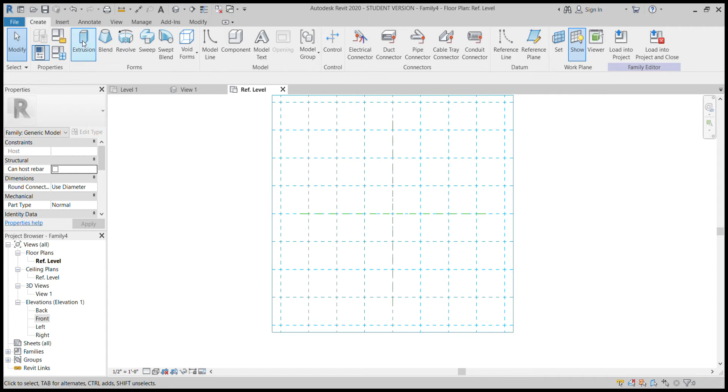The best way to show that is first we have to create an extrusion. So we'll come in here, create a simple 3x3 square, and make it come out 3 feet, giving us essentially a perfect cube. The way an extrusion works is it creates something off of a surface to add more. The void extrusion is going to cut out that shape instead.

If you click on the void forms, it gives you the same options as the regular ones, just in void versions. So you have a void extrusion, a void blend, a void revolve, a void sweep, and a void swept blend. They all work and function the exact same way, but we're going to stick with the simple void extrusion to start.

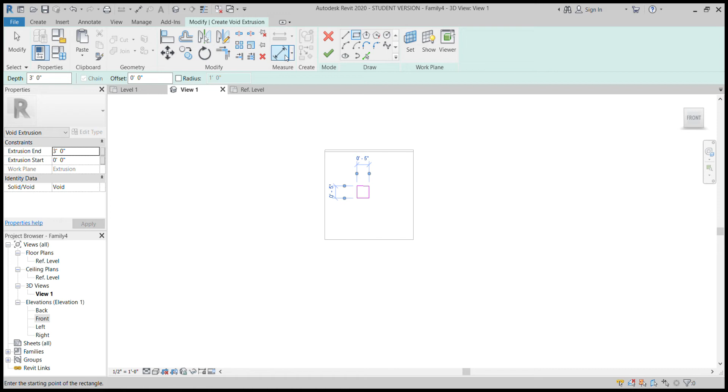This is where people get really confused: you have to pick your plane. So I'll click pick plane and pick this side, our front side. Let's cut out a simple 5x5 hole through it. With these, your start and end are different — usually your end pulls up, but this time it's going to push in. If we click OK, we can see it cut that hole into the shape.

Because it's a 3x3 cube, it went all the way through, and we can see it highlighted when we hover over it. If we click on it, we have the same drag and drop functions. But if we cut this down to just 2 feet, we'll see it doesn't quite make it all the way through — it only cuts partway.

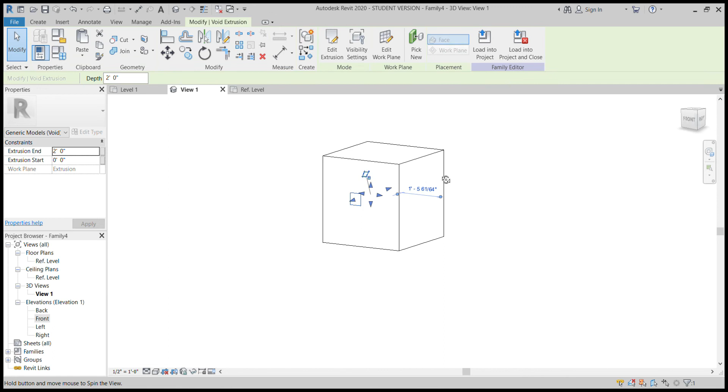So with this, you're able to start molding and crafting — it's kind of like sculpting. You could take a block like this and sculpt shapes out of it, and get really interesting results. Let's experiment with a few other options.

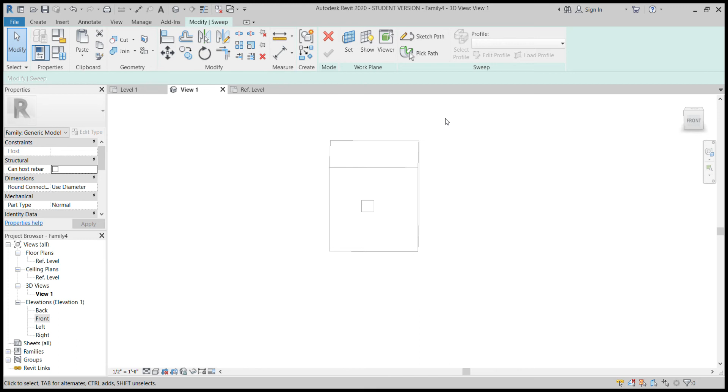So if we take the void form, this time we'll do the sweep. We're going to pick our path, and this time I'll use pick lines and just pick the top.

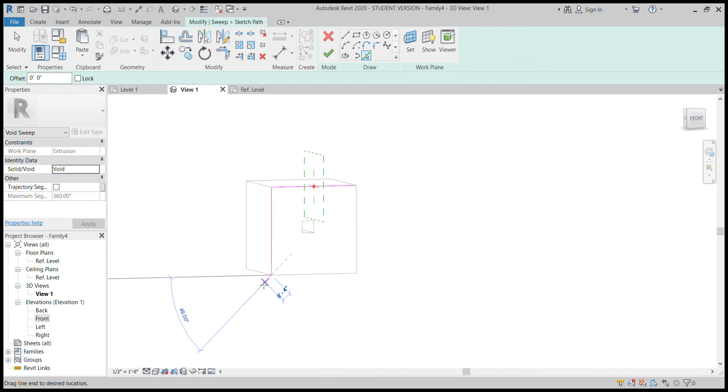It got mad at me because I clicked more than once. But if I do this, you can see how the line goes this way, that way — and this is where it gets tricky if you're not careful, because I actually don't want that line. I've got to square off and grab the correct line. Okay, so it still wraps it around.

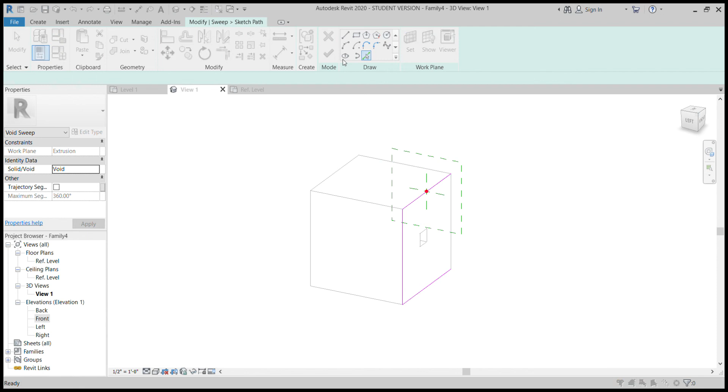Now what we can do is click OK — more than one loop, so let's cancel that and try again. We'll pick, once again, using pick line — we just want that line by itself. Okay, we'll take that one and leave it at that. So I'll click OK.

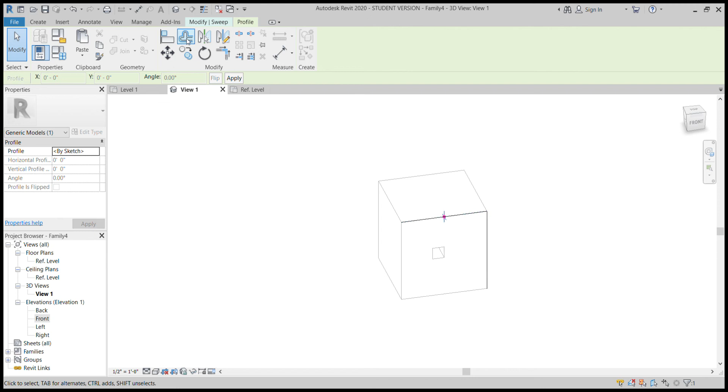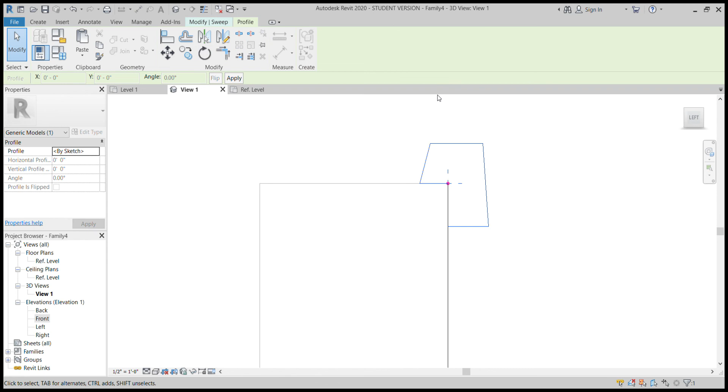It's hard to see, but our plane is there, and we're following this line by that line. If we go back into modify, edit profile, show our plane, and hop onto this side, we can actually see what we're going to cut. If we do anything like this, it won't do anything, because we just outlined something that doesn't exist. If we click OK and OK again, it'll show us it's there, but as you can see, it's not cutting anything.

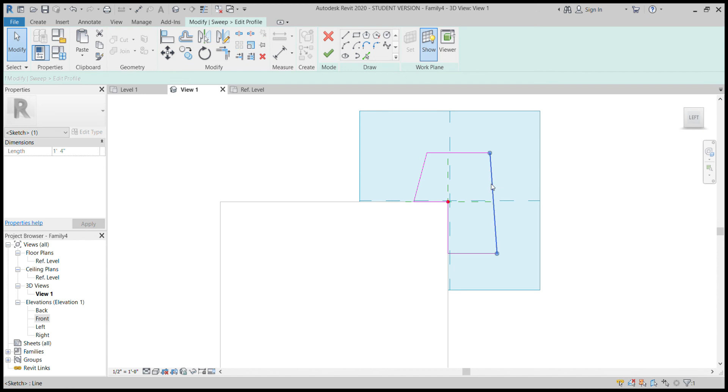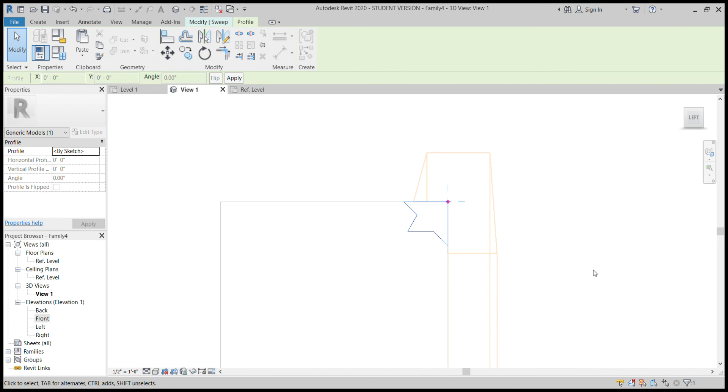So let's go back into it, hop back onto our side, and double click on it again to get our purple lines for editing. We want to leave our box there, but let's get rid of these lines we created, and instead do the opposite — start here, come in, and just like that shape we made before, cut out that shape. Click OK, all of our lines are closed, and if we OK it one more time, it now carves that section out.

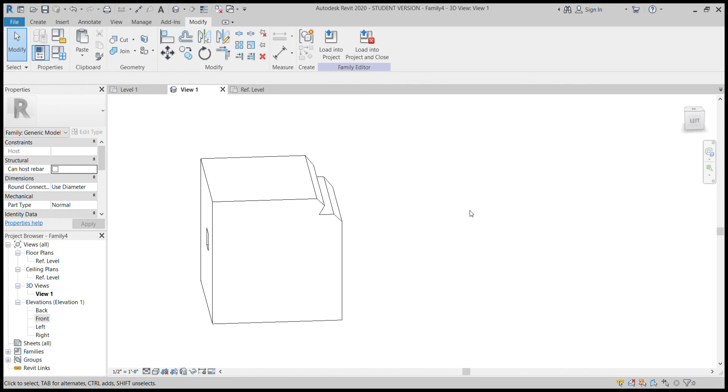This works well if you have a column that you want to create an intricate topping for, or pillars. You can create a simple extrusion, and rather than trying to draw and create a fancy extrusion directly, you just create a simple shape and then cut a fancy shape out of it — giving you an easy way to customize and edit as you wish.

This will behave just like anything else. Because we selected our plane to be on that side, if we extend this side out, it'll extend with it, it'll shrink with it, and so on. And that's how a void form works.